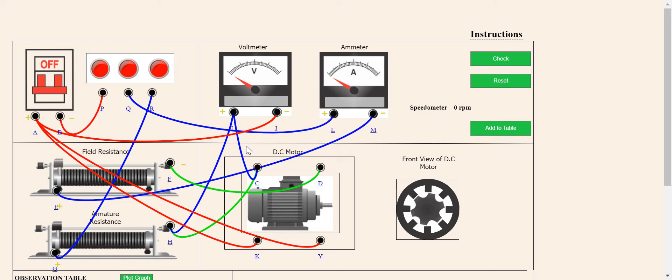So let me check whether the circuit is correct or not. So connection is correct. Let me first set the minimum sufficient voltage to the motor by varying the armature rheostat. It is set, so you can see the reading in the voltmeter, that is 220. Presently the motor is in rest condition, so I have to reduce the field resistance so that the motor should start.

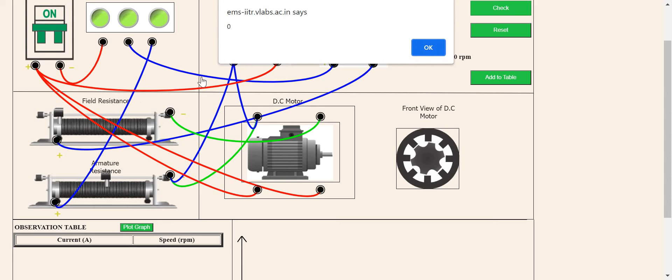So I will just, so I have varied for 2 points. The current shows 0.2 ampere and the speed is 2340 rpm. You can note it in the observation table, so I will add to the table. Speed is in rpm, revolutions per minute, and current is in ampere. In the table only numbers will be given. The current column is in ampere, and the speed column is in rpm.

So I will decrease the resistance for another point. I will set at 3. Now you can see the speed decreases to 2100 and current increases to 0.3 ampere. As you can observe, the current is increasing, which means that field resistance is changing. The flux of the field winding is directly proportional to current. As current increases, the flux in the field winding also increases, which means that speed will reduce.

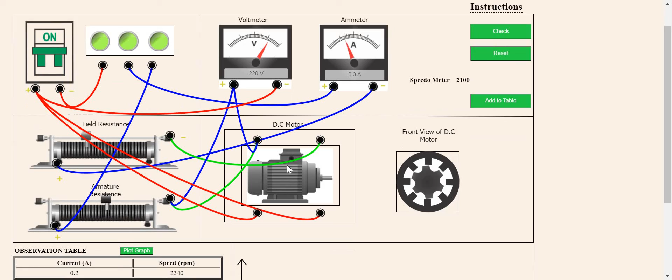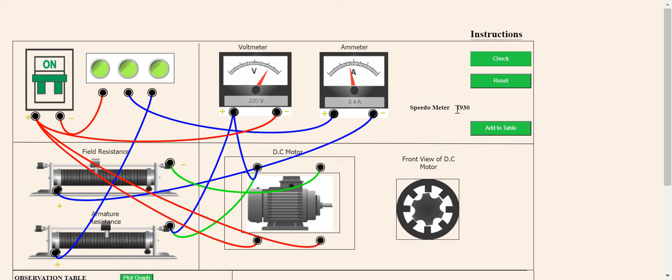In the previous reading you can observe at 0.2 ampere current it is 2340. At 0.3 ampere it is reduced to 2100. I will add to the table. Now next I will increase the rheostat. I will move a bit further and check what the speed and current are. The current is 0.4 and speed reduced to 1930 rpm. I will add to the table.

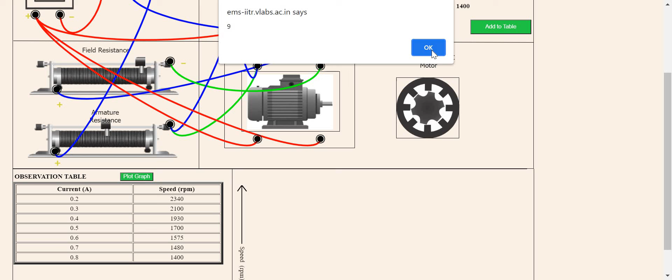I will go further to position 5. Current is 0.5 ampere. Speed decreases. At 6 it is 1575. At position 7 it is 1480. I will increase so on. You will get a number of readings. So I have taken 8 readings.

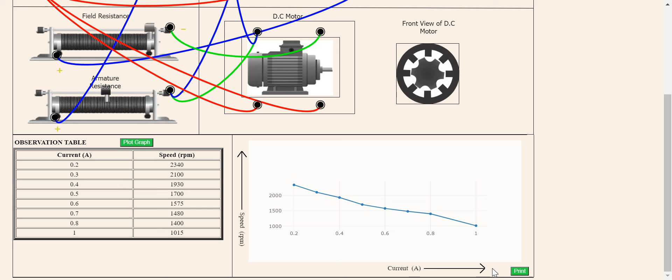By having these all, you can draw the graph. So the graph looks like this. You can take a printout of this graph. I hope everyone understood this experiment.